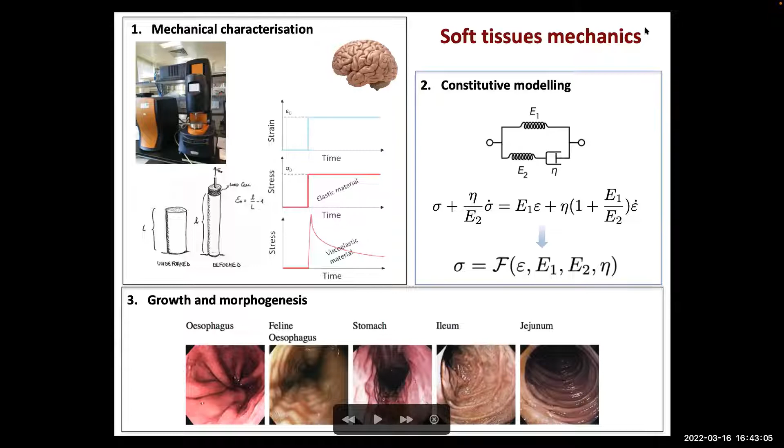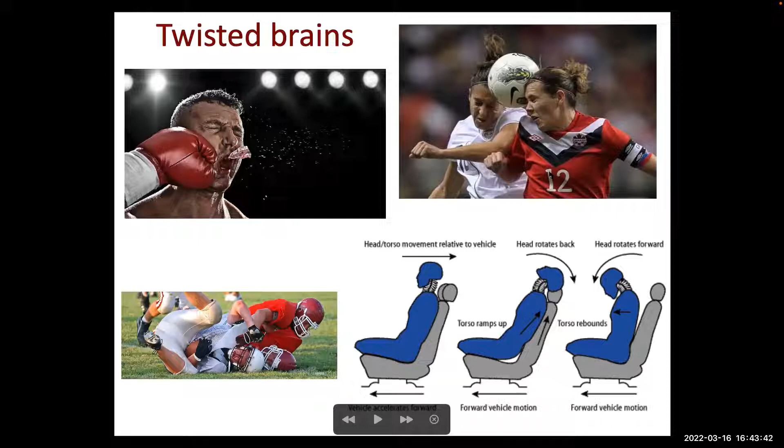So why I call it 'twisted brains' - well, it's a play on words, but for me, twisted brains refer to situations where the head gets a sudden rotation, so the brain gets a rotational acceleration. Think about a lateral punch to the head or a car accident with a lateral impact where the brain goes into rotation. This type of impact is supposed to be more dangerous than classical frontal impact, where the brain only undergoes compression, tension, or shearing.

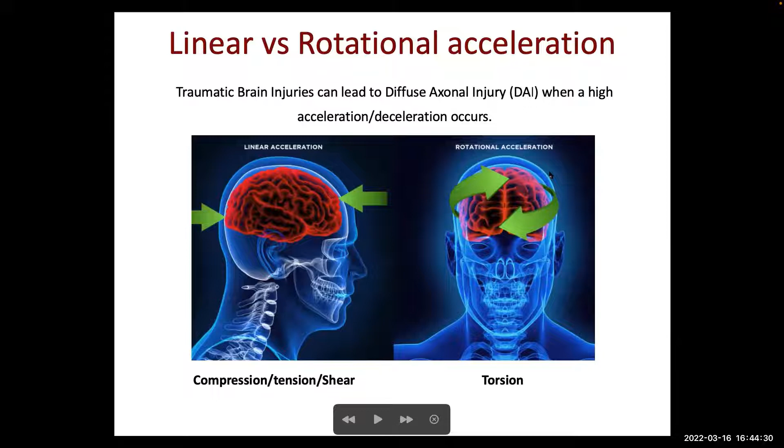So rotational acceleration creates a scenario that ends up generating more damage than a frontal impact. So the aim of my study was to understand a bit better the mechanics of the brain in torsional deformations.

What is believed to be happening at the cellular level in the brain during these impacts is microstructural damage of the cells. The cells of the brain are called neurons, and they have a head and a tail - the tail is called the axon. Axons are the units that transmit signals between cells and allow the brain to function healthy. During traumatic events, the axon twists, then stretches, and then breaks.

So when this happens, the brain is functionally damaged because the transmission of signals is interrupted. This happens in every type of impact, not only rotational impact - it's just to give an explanation of what happens at the very bottom unit of the brain.

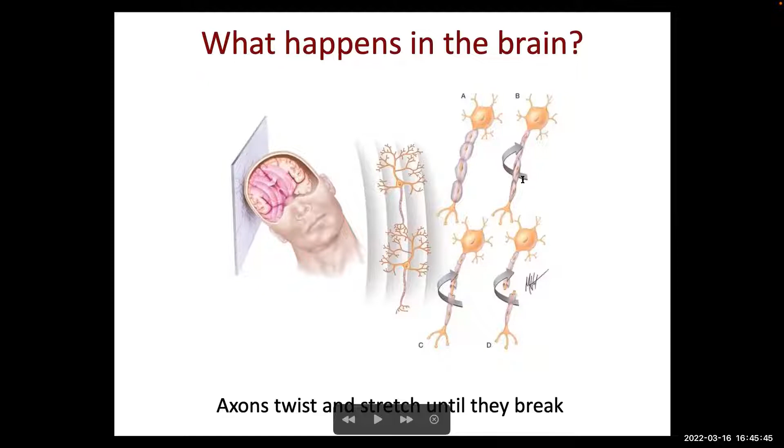As mathematicians, what we can do is basically recreate an impact and try to understand where the most damage can occur in the brain after different types of impacts, forces, accelerations, or conditions. To do so, we build numerical models, because analytically we cannot do much. Each numerical model of the head needs to be fed with information on how each component works - this means finding good constitutive models for each component: the brain, the skull, the membranes, everything.

And to do so, you need to test tissues. That's the outline of what I've done: I took pieces of brain, put them into a machine, tested them, and then modeled the experiments to get out the mechanical parameters - the mechanical properties of the tissue under such deformations - and then used them to simulate real head impacts.

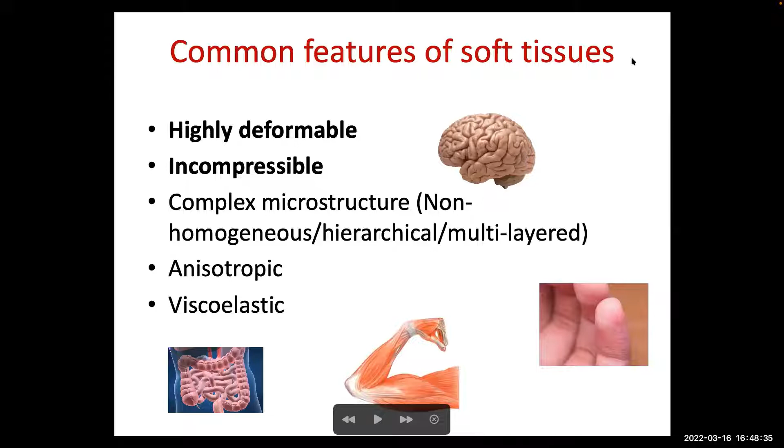The brain is highly heterogeneous, made mainly of two components - gray and white matter - which have different mechanical properties. In general, soft tissues are also anisotropic, though this doesn't really apply to the brain, and viscoelastic, meaning their mechanical properties are time dependent. All these things should be accounted for when modeling soft tissues.

From the experimental viewpoint, there are two main techniques used to characterize soft tissues - I'll focus only on the brain here. The first category is non-destructive testing, which allows testing the tissue without taking it out of its natural state. It uses waves - you send a wave into the tissue and record its speed. If the speed changes, it means there's some non-homogeneity in the tissue, or the tissue can change stiffness, and that's how these changes in properties are measured and captured.

Then the other main type of test that can be done is the destructive test. Basically, for this, you need to take a piece of tissue and put it into a machine. That's why it's called destructive. Of course, it's maybe less truthful, but it still gives information on the mechanics of the tissue.

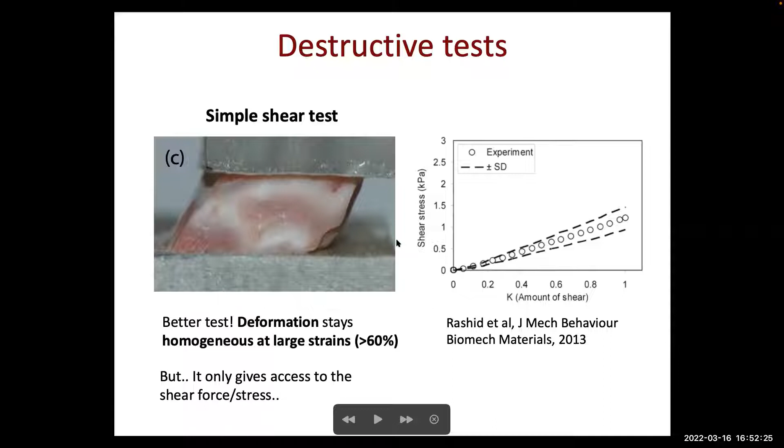Simple shear is a good test because it allows reaching high levels of stretch, but again, it gives us access to only one set of data. So think if your model has more than one parameter, you will only have one set of data to estimate those parameters, which might give rise to non-unique solutions. So a good test should give you enough data to measure independently each parameter that you have in your model.

So that's why we did torsion, because the torsion experiment can be done in a machine that measures not only the torque required to twist the sample, but also the normal force that is required to keep the sample in place. So it gives us access to two sets of parameters. And because torsion is a global shear, it also allows reaching a wide range of deformation.

So to do a torsion experiment, we use what is called the rotational rheometer, which we didn't have at that time in NUIG, so we went to Dublin. I went to Dublin and used that machine in University College Dublin. As I said, torsion gives access to two sets of parameters: one is the shear, the torque, sorry, and the other is the normal force.

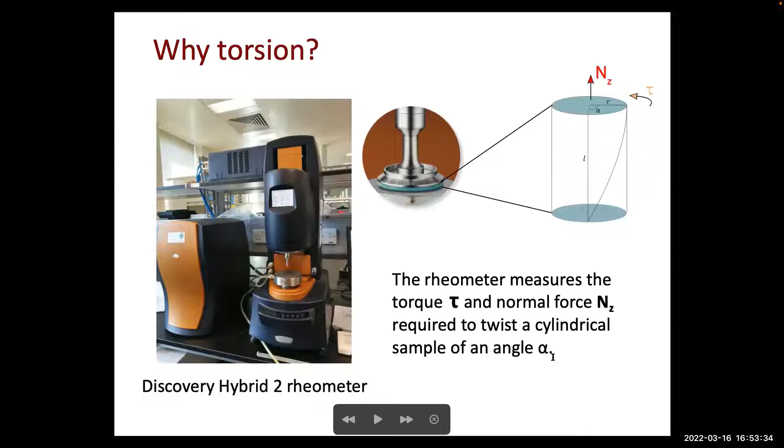So there's a bit of disgusting pictures that comes after this as well. So the first step was to get the samples. In Ireland it's very difficult to get human samples. One main reason is because Ireland is so small that you might end up having in your hands the brain of someone that you know. So that's absolutely not possible.

So the other option, the closest option to humans is pigs, surprisingly enough. So I went to a local abattoir and I got heads, pigs' heads, because in Ireland they don't eat the brains from pigs. They don't do the fry, the mixed fry, fritto misto alla piemontese. So they don't use brains, so that's good for scientists because we can use them. After 3 hours of hard work, you get a piece of brain which is 5 centimeters by 4 max.

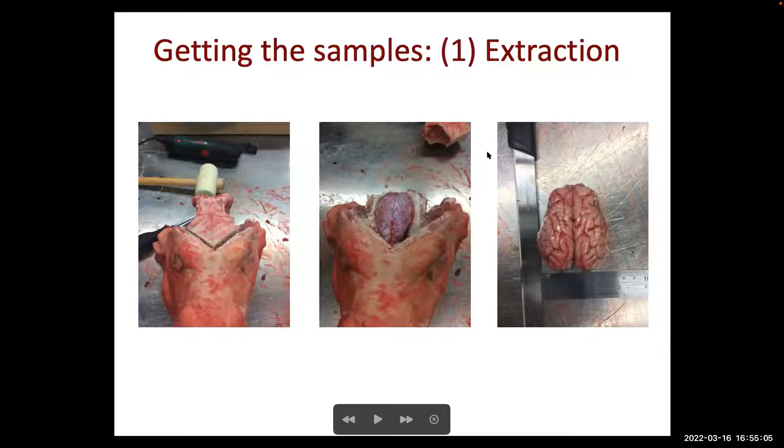And if you haven't thrown up at that stage, you can then go to the lab and test these tissues. I won't go into much detail on how to open a head, but it's very hard work.

So from each little brain, we got maybe 9 samples. I went to the lab many times for several weeks, and at the end I got a good bunch of samples.

So when I say samples, they are cylindrical samples, taken from different portions of the brain. The size, roughly, each sample was 10 millimeters high, and a diameter of 20 millimeters.

I think in total I might have had 100 samples, maybe less. But good samples, no, 100 is too much, I think I had less. The samples in which the test and the experiment went well were very, very few.

So how does the protocol work? We had those samples, stored them in the fridge after the dirty job, and then transported them into another lab where the rheometer was. The samples were tested within about 2 hours from when they were harvested from the heads.

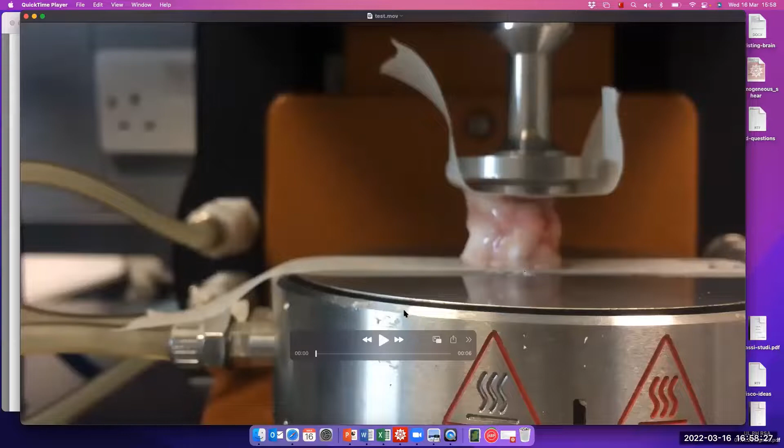So what happens in the experiment is this - I'm going to have to exit the presentation and show you the test here. You see at some point the plate will start rotating and then the sample breaks. In the meantime, I'll play it one more time.

At that point, the normal force is zero, then the plate starts rotating at a constant speed, and we record the normal force and the torque.

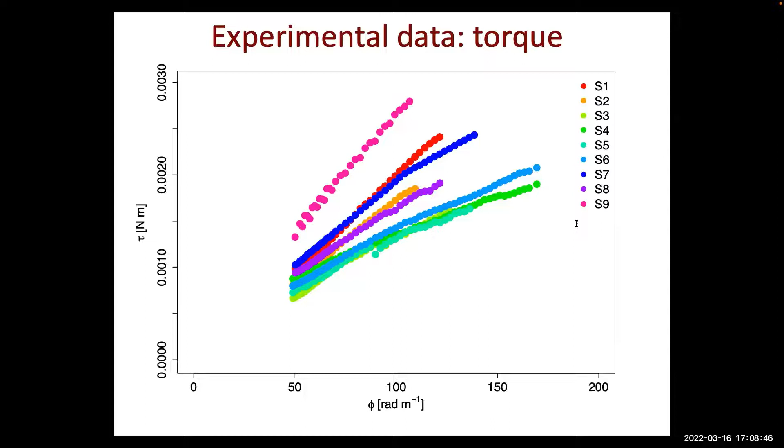So basically from this section, what we have discovered is that the brain in torsion displays the positive Poynting effect. It tends to expand vertically, so push against the plate - that's why the force is negative. The other interesting thing we managed to do is quantify this normal force, because in simple shear, there's no commercial device you can buy from a company like a Rheometer that measures both the shear and the normal force. But with the Rheometer, you can quantify basically the Poynting effect for any tissue. In this case, we did it for the brain.

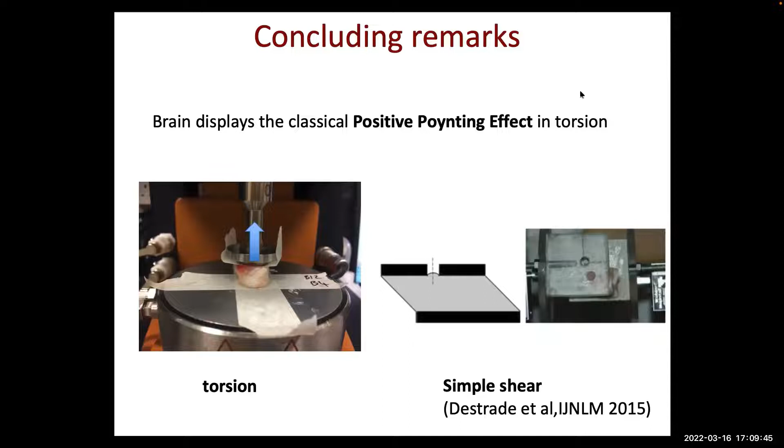Okay, so now I'll move on to the modeling of the experiment. I didn't know how many of you were familiar with the theory of continuum mechanics, so I did a bit of introduction on that.

To model the mechanics of the brain in torsion, we use the theory of continuum mechanics, in which we treat the sample as a solid body. How do we write the equations that govern the deformation of a continuum body? We need four key elements: the kinematics of the deformation, the balance laws—in this case just the balance of linear momentum to simplify things—the constitutive equation, which tells us how the material behaves, and the boundary conditions to close the problem.

Okay, so let's write down the deformation. As I said earlier, soft tissues are highly deformable, so we need to use the theory of large deformations, for which we define an initial reference state where the tissue is in its undeformed state, and then a final deformed configuration where the tissue has been twisted. How do we go back and forth from these two states?

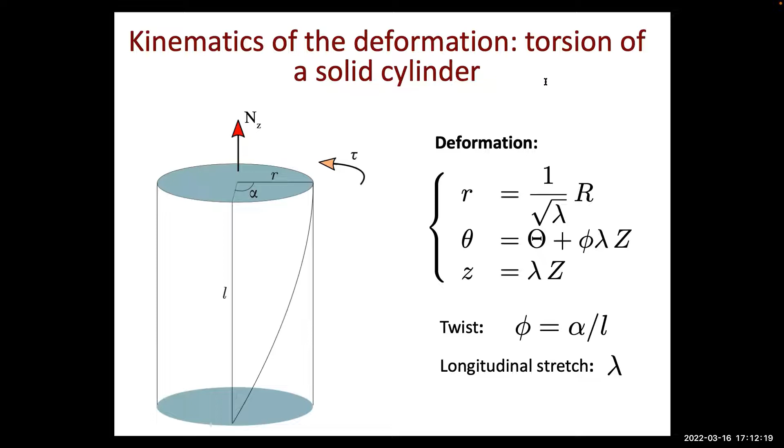Then the balance equations reduce, as I simplified here, to the balance of linear momentum, where we have the main equation—the divergence equation—with the boundary conditions. So divergence of sigma, where sigma is the Cauchy stress tensor, a matrix with 9 components. So we have 9 unknowns in this system, and we have one boundary condition, which is on the radial stress.

That translates into this: there's no traction on the lateral surface of the cylinder, so the radial stress component at the outer radius is 0. So the divergence of sigma equals 0.

Sigma is a 3 by 3 matrix, so it's a tensor. The divergence of sigma is a vector, so with 3 components. So we have 3 equations, 9 unknowns.

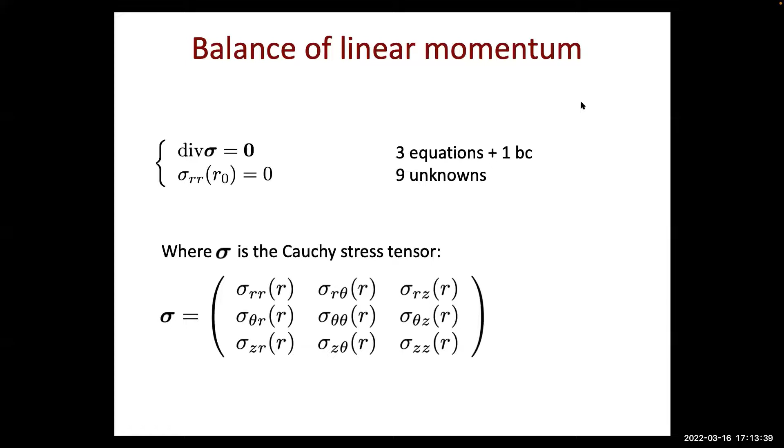How do we work this out? How do we reduce the unknowns? With the constitutive equation. Here again, I didn't know how familiar you were with continuum mechanics theory, so the constitutive equation is basically the equivalent of Hooke's law for the spring.

It's a function that relates the deformation to the force applied to the body. For the spring it's a linear relation between the force and the displacement, and the coefficient linking these two quantities is the stiffness constant, K.

In nonlinear elasticity, the constitutive equation is something a bit more complicated that relates the stress to the deformation, and the link between the stress and deformation are the mechanical parameters, elastic parameters, because here we are just treating elastic bodies.

So here we made a couple of assumptions. The first one is that the solid is hyperelastic, so you can write the constitutive equation with respect to an energy, the strain energy function W, which is a function of the deformation through F, the gradient of the deformation.

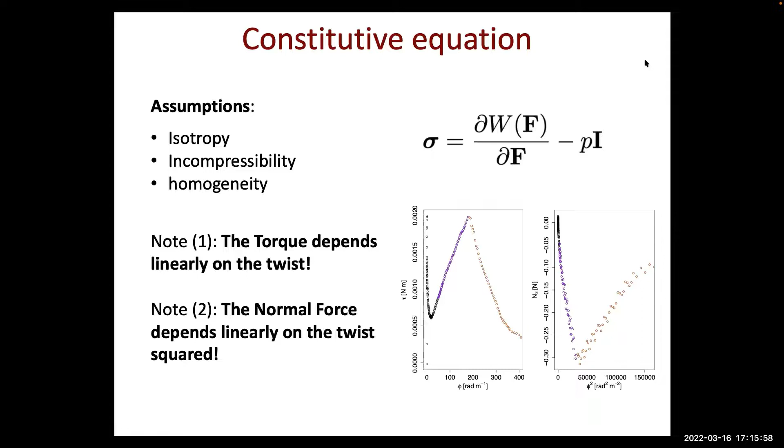This is basically choosing a form for the strain energy function in the form of a Mooney-Rivlin strain energy function, which is this one here.

That depends, so F again is the gradient of the deformation. The main thing here is that depends on two parameters, constitutive parameters, C1 and C2.

Basically substituting W into the constitutive equation, you get this final constitutive equation. So you have a relation between the stress and the deformation. Here is the tensor B, the left Cauchy-Green strain tensor, which is a measure of the deformation, and it depends on these two parameters, C1 and C2.

Now, just to go back to the main formulation of the problem, we have the governing equations, so the divergence of sigma with the boundary condition on the radial stress, which is 3 equations with 9 unknowns.

Then we have the constitutive equations, which we can plug into the divergence of sigma, and we end up with one unknown only, which is the Lagrange multiplier, because B is given by the gradient of deformation, which depends on the deformation here.

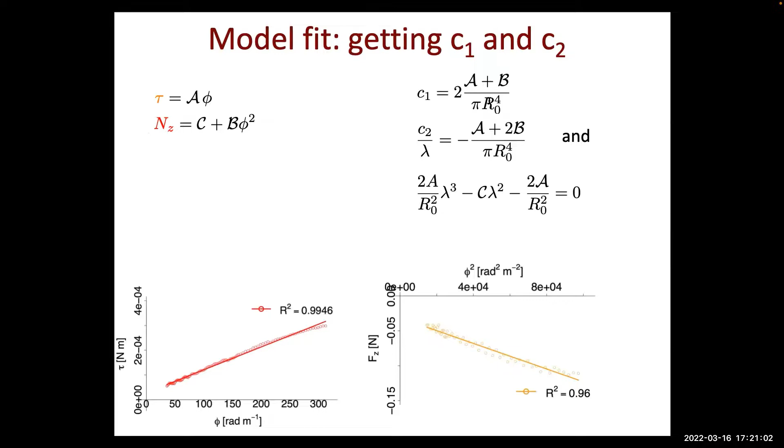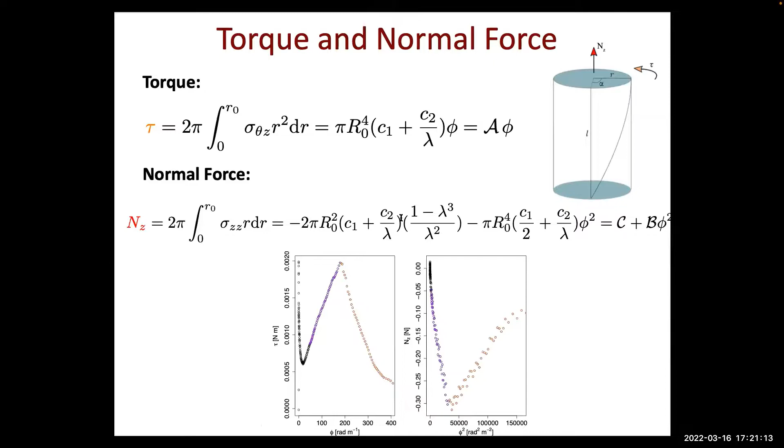By reversing, well, we know how A, B, and C are linked to the constants C1 and C2. Because from here, this would be the coefficient A, this would be the coefficient B, and this would be the coefficient C. So we can calculate C1, C2, and the pre-compression lambda.

We can do that for all the samples, and we end up basically with an estimate of C1, C2, from which, you remember, 2 times C1 plus C2 is equal to the shear modulus, mu. So we basically estimate mu and the parameter C2 for each of the 9 samples.

And here are all the data. Here are the coefficients of determination that tell us how good the fitting of the model with the data is for each sample. The closer to 1, the better the fitting. So these values in these 2 columns tell us that the fitting was actually pretty good and accurate.

What we have at the end of all these experiments and modeling are basically the 2 parameters, mu and C2, that we have estimated from our torque and normal force from the experiments. And we compare them with the estimation of the shear modulus from simple shear experiments, and it actually is in the same range. So that's another extra validation.

So from this section we have another 2 good things. One is that we were able to estimate the shear modulus and the second Mooney-Rivlin parameter, C2, which is the one linked to the Poynting effect.

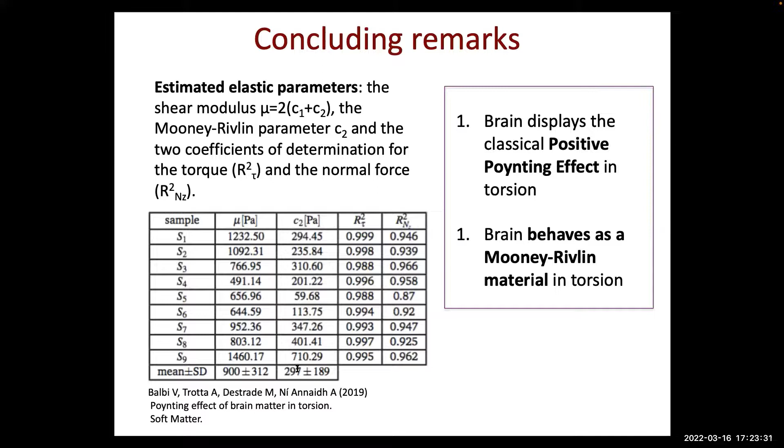To further validate our modeling approach, we also did a finite element model of the experiment. We built a torsion of a cylinder in Abaqus, a finite element software, and we simulated the torsion in two cases: one simple torsion, the other torsion with pre-compression.

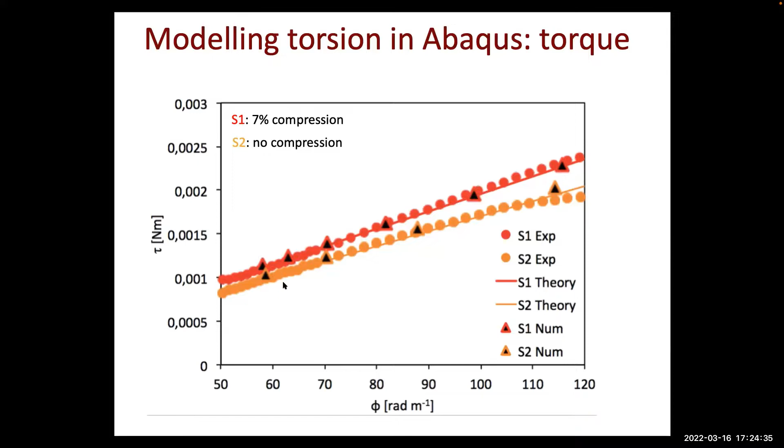We compared the results again of the torque versus twist and the normal force versus twist squared, obtained from the numerical simulations with those obtained analytically. You can see the triangles are the numerical results, the line is the theoretical modeling, and they match. The dots are the experiments. This is the graph for the normal force.

Here there's a bit of a difference between the numerical model and the analytical model. We think it's because, remember, the compression creates a little bulging. Analytically this bulging is not predictable, but numerically it is. That's why there's this little difference between the theory and the numerical results.

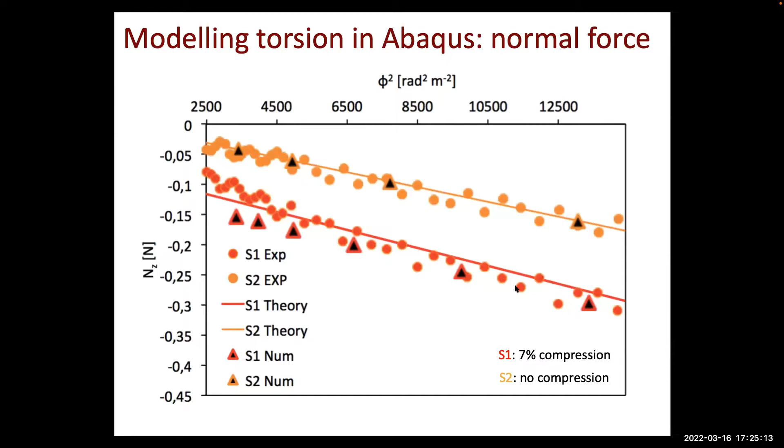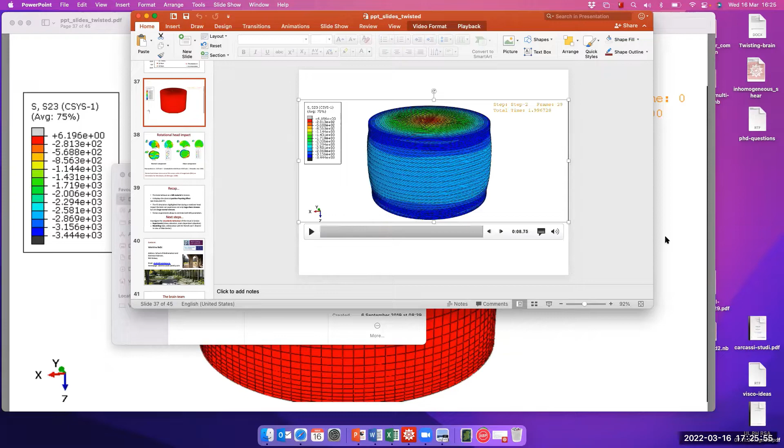Here is just the video of the simulation. It's not really interesting, but I can show you because you can see the little bulging. Yeah, you can see that as the cylinder is pre-compressed, there's a little bit of bulging. That's probably what causes the difference between the numerics and the analytical solution.

Perhaps this description, with the imposed boundary conditions you show us, is not entirely consistent with the logic, because if you keep the lower circles fixed, you may have another mechanism — the deformation is not as simple as shown. But this is a question, since you impose a deformation which is rather simple in the analytical model, whereas in principle we should have a complete boundary value problem. Yes, because the finite element code can account for all the edge effects, everything. But at least it's not too far from the analytical solution.

Then at the end, what we did — so far we were able to first find out that in torsion we can use a Mooney-Rivlin model to model the elastic behavior of the brain. Then we had the two coefficients in the Mooney-Rivlin constitutive equation, so we put this information into a finite element model of the full head. We inputted for the brain components the constitutive equation from the Mooney-Rivlin model with the parameters estimated from the experiment.